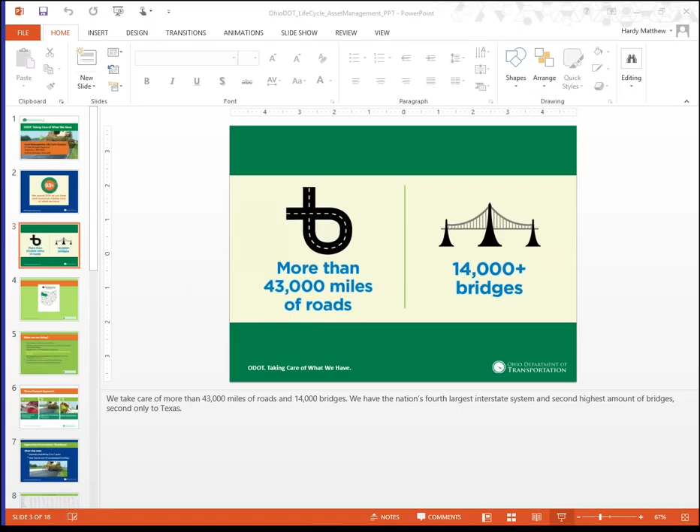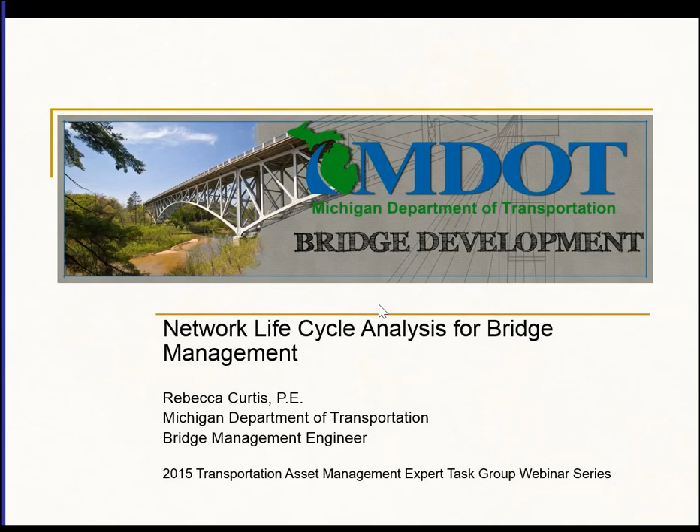All right, well, good afternoon everybody. As Matt said, my presentation is going to try to tell the story of how Michigan has implemented life cycle cost analysis at our network level to better manage our inventory of bridges. So with any good story, we need to set the background for the primary conflict within our plot. And this slide is sort of the MDOT bridge program's version of 'It was a dark and stormy night.'

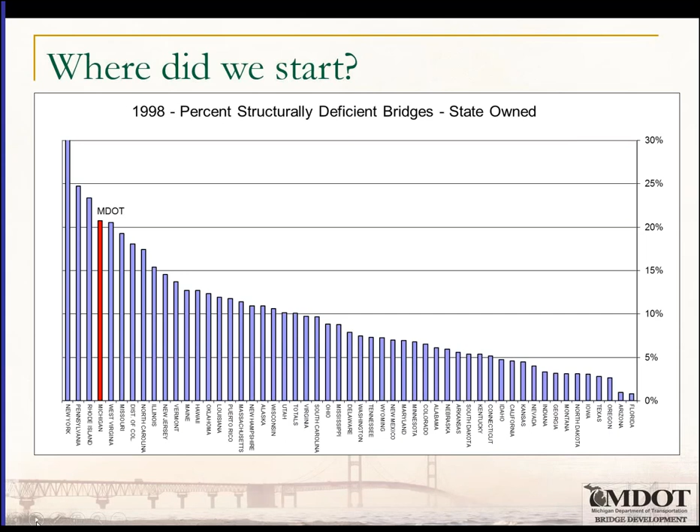So in 1998, MDOT was very near the bottom of the country with respect to the percentage of state-owned structurally deficient bridges that we had within our inventory. So then in 1998, that's when MDOT began our commitment to asset management. In combination with an increase in our state highway funds, we committed to sound asset management practices and the ability to report on performance. Goals were set for each of our programs, and for bridge, we set the following goals.

So first, we have to immediately address the needs of 100% of our structures of critical concern. As safety must always be our primary goal, it's important to recognize that, so that despite your best efforts of asset management, either limited resources or unforeseen events can cause situations which require either restricting a structure, performing repairs, possible replacements, and accounting for this when you're setting your goals is going to give you a more realistic picture of what your needs are.

So the primary condition-based goal for MDOT that was set in 1998 was to achieve 95% of our freeway bridges in good or fair condition by the year 2008. This condition was measured based on the minimum condition rating for the National Bridge Inventory components, so your deck, superstructure, substructure, or culvert ratings, where any of the ratings of 4 or less would be considered poor for the whole structure, 5 or 6 would be considered fair, and 7 through 9 are in good condition. The secondary goal was to achieve 85% of the non-freeway bridges in good or fair condition, also by 2008, using the same NBI minimum condition rating scale.

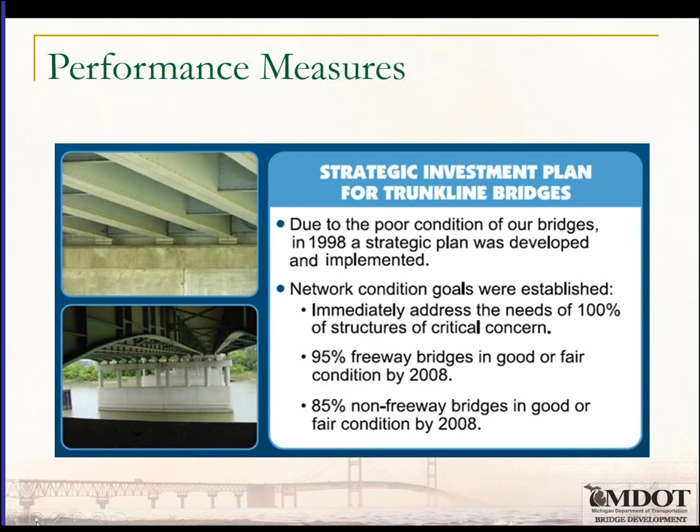So how did we do? Well, as of 2014, you can see that MDOT is now more toward the middle nationally with respect to the percent of state-owned structurally deficient bridges. The 85% non-freeway condition goal was met before 2008, so that goal was achieved. The freeway condition has steadily improved over time to really closely approach the 95% condition goal. However, increasing costs and steady revenue have prevented us from completely reaching that goal.

So we would not have been able to accomplish the improvement that we saw, however, without our focus on mix of fixes, a dedicated preservation template, and the ability to justify performing preventative maintenance on our bridges. And that's where the life cycle cost analysis enters into our story.

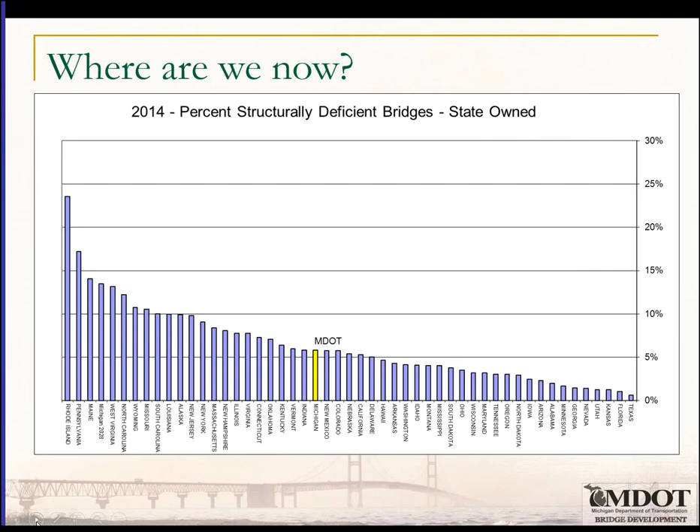So it may help to understand a little bit about our inventory of bridges within Michigan. Michigan has just under 11,000 NBI structures, of which MDOT maintains 4,450. Our overall state-owned bridge condition is currently at 94.2% good or fair. The majority of our inventory was built between 1958 and 1971, which makes it about 50 to 60 years old on average.

MDOT NBI bridges are primarily simple steel or simple pre-stressed concrete structures. Operationally, the structure at MDOT is a decentralized agency, and we are divided into 7 regions. So while the overall network of bridges is managed centrally in my office, each region manages the bridges, including performing inspections, scoping for project selection, and determining which projects should be included within the 5-year plan for their inventory of bridges within their region. In addition to the state-owned structures, our local agencies maintain 6,541 bridges at a condition of 85.3% good or fair right now.

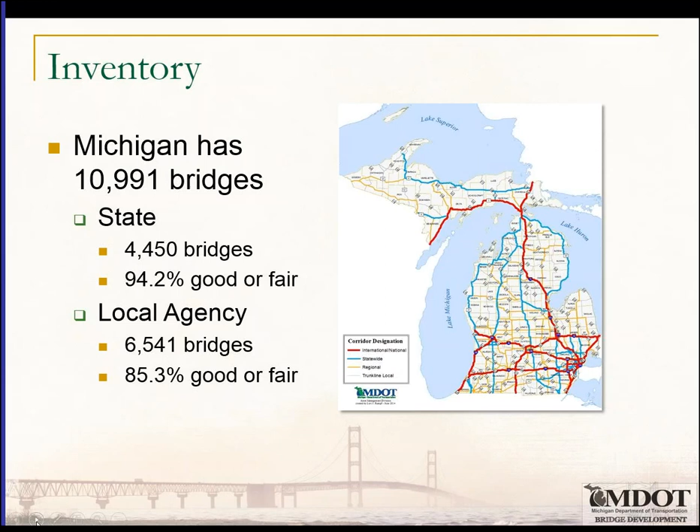So getting into the network analysis, there are 2 possible ways to categorize the asset management for our bridges: network or project level analysis. At MDOT, we use both types of analyses. For our network analysis, we use the National Bridge Inventory minimum condition ratings, or the lowest condition of either the deck, superstructure, substructure, or culvert ratings. Using an internally developed spreadsheet, the Bridge Condition Forecast System, or BCFS for short, we calculate the probability of deterioration, compare it to the investment in projects on our bridges, and use that to predict future network condition levels.

We use the network analysis to manage large populations of bridges at one time and to help allocate funding at the region level. We also use this forecasting tool to provide high-level information on our condition, and that information is often very useful for our executives, the legislature, and the State Transportation Commission.

At MDOT, the project-level analysis is more specific to each bridge. In that case, we use the National Bridge Elements and have historically used Pontis, and now AASHTOWare bridge management software, to forecast conditions at a specific bridge based on element condition. We use the project level analysis to prioritize between possible projects, to manage specific bridge elements, and to provide useful information to our bridge engineers and bridge practitioners.

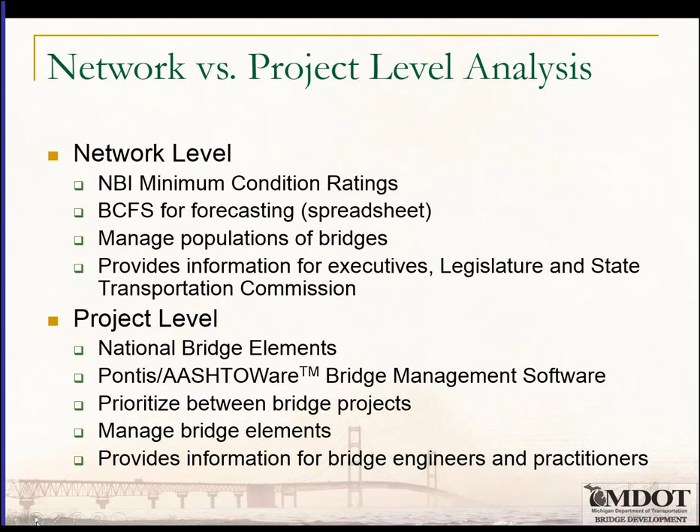So in order to effectively manage our network of bridges, we find it very helpful to have accurate data that's readily accessible by all the people that are going to be managing them. At MDOT, we have a web-based inspection and reporting system called MiBRIDGE. MiBRIDGE allows our inspectors to enter both the NBI and the element level data in the web-based system. MiBRIDGE also allows the inventory to be viewed quickly on the dashboard, which provides condition information and sorting functions, and these directly connect to our condition-based goals.

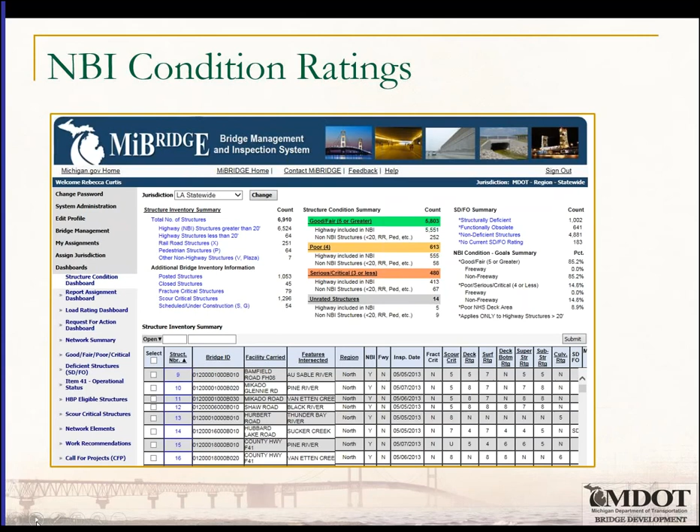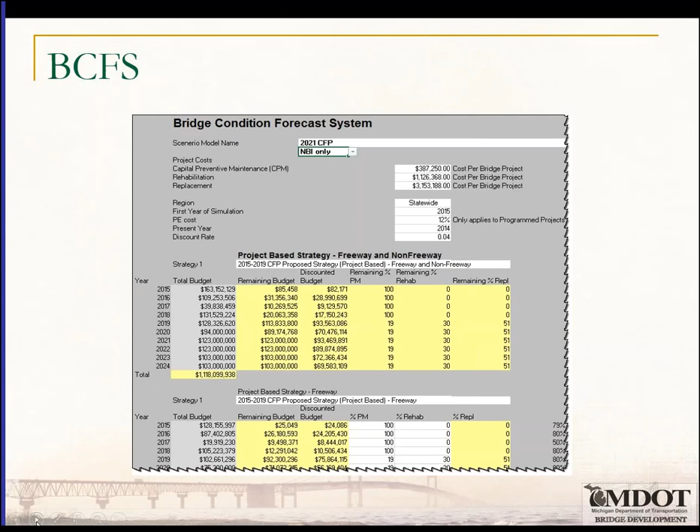This allows the person performing the analysis of their network to evaluate network level condition while still being able to quickly drill down to the bridge level. So using the data that is entered into MiBRIDGE, I populate the Bridge Condition Forecast System, or BCFS, with this information in order to predict future condition. Being in an Excel spreadsheet form, BCFS is easily editable and can be modified to meet a variety of different uses, which I'm going to give an overview of shortly.

So in its typical format, BCFS does require some input. You need to start with the NBI conditions of your inventory, which is the starting point of your analysis. BCFS also requires budgets that are entered to account for the work that's going to be performed on your network of structures. The budgets can be entered as $0, of course, for a do-nothing strategy.

BCFS requires that you identify what your preservation strategy is, or your mix of fixes, which it then uses to dedicate a percentage of the budget to each primary work category. At MDOT, these categories are preventive maintenance, rehabilitation, and replacement. Replacement projects typically focus on poor bridges, which relates to a National Bridge Inventory minimum condition rating of 4 or less. Rehabilitation projects, such as concrete overlays, focus on bridges with minimum condition ratings of 4 through 6, while preventive maintenance focuses on ratings of 6 through 8 in order to delay future deterioration.

Project costs for each of those primary work categories must be entered so that the program knows how far the budget in each category can go. We typically use the average of the last 2 years' cost for the work category to arrive at this number. The next input is the preservation path, or the anticipated benefits of each main work category on the bridges used, based on your budget. Finally, BCFS allows you to enter your programmed projects if you want, leaving the budgeted portions for only the outer years that are not fully programmed.

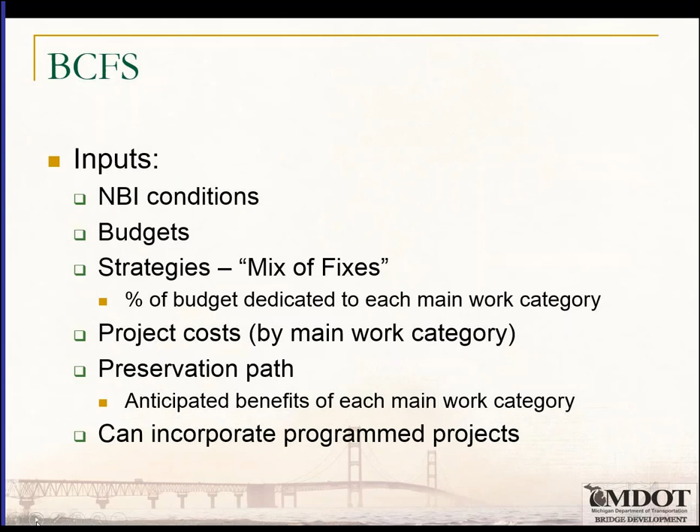So the cornerstone of the Bridge Condition Forecast System is the transition probabilities. Using the changing minimum National Bridge Inventory condition ratings over time, BCFS calculates the likelihood that a structure is going to change from one minimum condition rating to the other. A matrix is developed from our historic inspection data, and then that matrix is applied to the entire network of bridges to project the condition out to each successive year included within the analysis.

So this image shows the transition matrix. The probability of a condition rating not changing is shown in purple. The average time in a rating is shown below that in gray, and then the cumulative time to reach a certain rating is shown in teal. So for this population of bridges, the predicted time to poor, or the time it would take to reach a minimum condition rating of 4 or less, is 43 years.

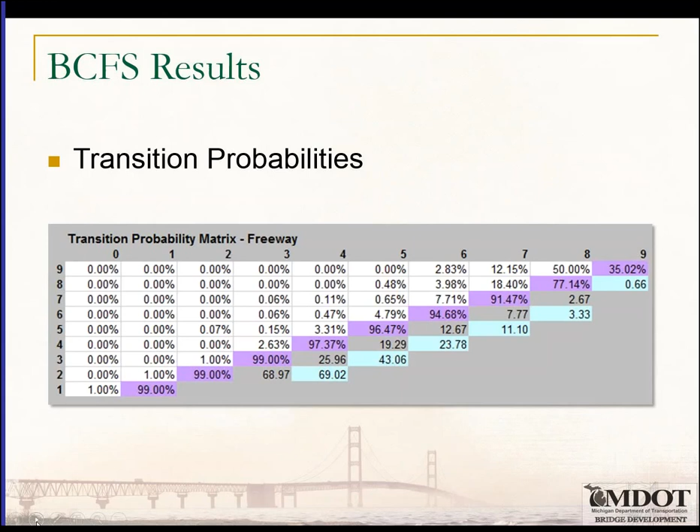So BCFS is also a tool to track deterioration rates, or the number of bridges within a network that fell into the poor category each year. This is not forecasted data, but rather is recorded historical data.

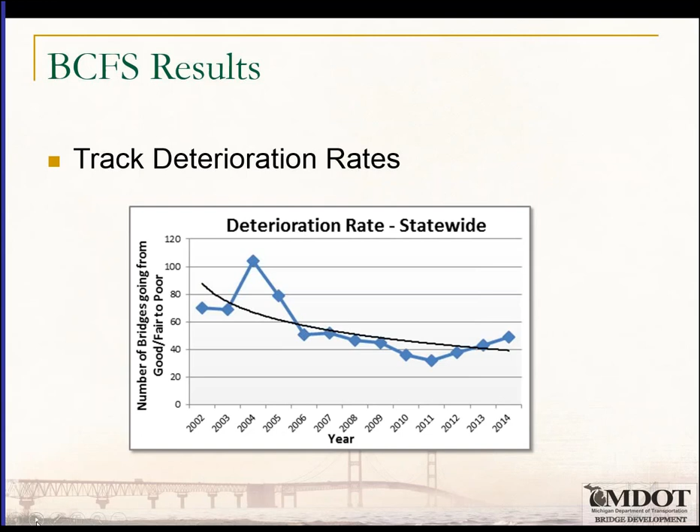Once all of your inputs are populated, BCFS calculates the projected condition. This is a combination of both the deterioration lowering your condition, and then, on the other hand, your programmed work based on actual projects, your budgets, preservation strategies, and the preservation path increasing or maintaining conditions.

In this example, our inventory is split into freeway and non-freeway in order to match our condition goals, but really the network could also be examined in any category that you chose, such as NHS and non-NHS, on-system and off-system, or your entire network together.

The analysis of freeway and non-freeway projections has been used here at MDOT as part of our call for projects process in developing our 5-year plan. So as I mentioned previously, selecting bridges for the call for projects process is done at the region level. However, determining the initial bridge strategy for each region is performed centrally based on our inventory, and that's updated each year. So funding within the bridge templates is then allocated to each region based on need.

And using this initial strategy, the region evaluates the potential projects being planned and then the impacts on the future condition as compared to that initial strategy and also an ideal strategy. As the bridge program is coordinated, of course, with the road and safety programs, the actual program selected for bridge is going to differ from the ideal. But BCFS allows the bridge engineer to predict the impacts of selecting those various projects and can use that in justification of whether or not a project should continue.

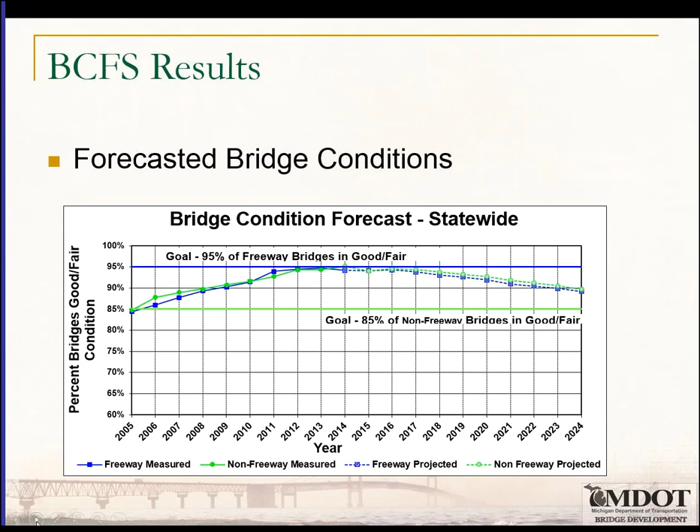Another way that we utilize BCFS is in demonstrating the value of preservation. So this is an example of the flexibility that I find in using an Excel spreadsheet to perform our network analysis. So I was posed a question by the chair of the Transportation Asset Management Council in Michigan. What would have happened if all of our local agencies had not begun to adopt bridge preservation and instead had continued down the path of worst first? Well, by running BCFS scenarios, I was able to model this situation.

So the top line is the measured condition. As the Transportation Asset Management Council was able to communicate the benefit of preservation to our local agencies, more preservation projects and rehabilitation projects were selected, which prevented bridges from falling into lower conditions. This slowed the deterioration rates of the local bridges over time, as you can tell by the improvement in condition.

The darker lower line is a condition that was predicted by the model using the actual budgets in the years under review, but using the transition probabilities that were in place before the push toward bridge preservation and a mix of fixes. So the difference in the condition versus the measured state and that predicted in this chart is just one more tool that can be used to communicate the value of preservation and asset management.

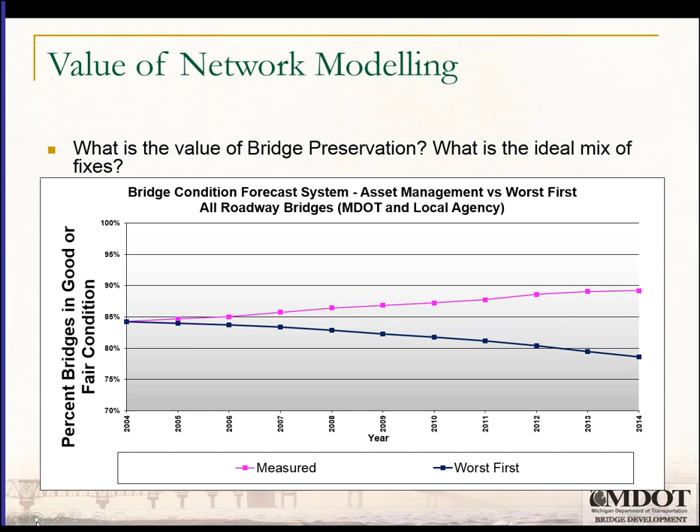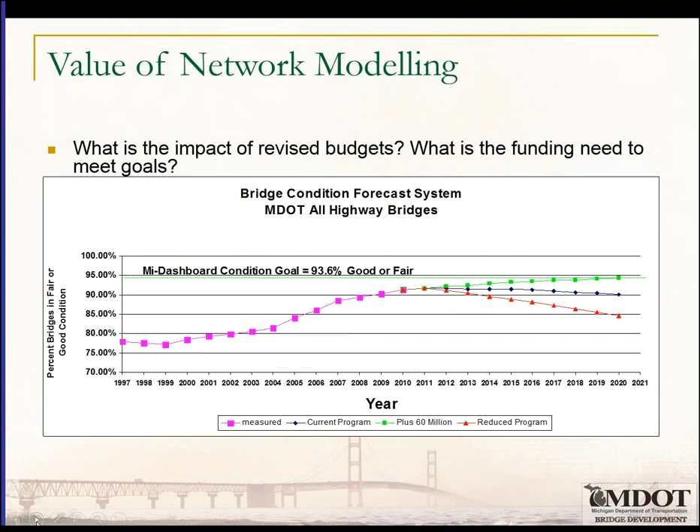So another example of how we use BCFS and our network lifecycle analysis is in the evaluation of innovative materials. Bob Kelly from my office took our basic BCFS approach and modified it to divide the network into 2 pools over time. All of the bridges start off in the main pool, but when they're replaced, they are moved into a second pool with lower deterioration rates. And this is supposed to reflect the benefit of the innovative material. So the network condition at any point is simply the sum of what is in each pool.

Simulations were analyzed for a few sample assumptions to demonstrate the process, where both the replacement cost was varied and the deterioration rate was varied, ranging from 1.5 times the cost of a conventional bridge with 1.5 times the life, all the way up to 2 times the cost of a conventional bridge and 2 times the life. The scenarios assumed a budget which was sufficient enough to correct most condition deficiencies in the short term. And when the effect of the discount rate starts to cut into the number of projects that you are able to perform in a year, the condition starts to go downhill, which happens at a rate around 10 to 15 years.

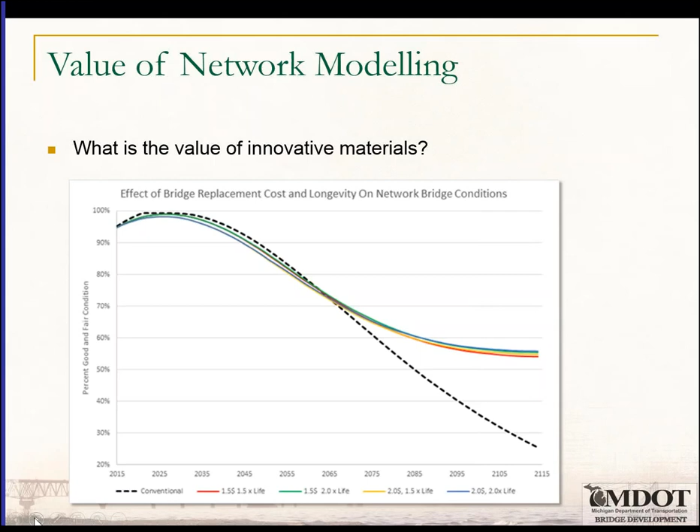Since it takes a while to build up a population of the more durable bridges as they're more expensive, then you don't start seeing the benefit of building the longer lasting bridges for about 50 years down the road. So until then, you pay a small penalty in network conditions because of the slightly fewer projects, but by the time you get 50 years out, those investments start to pay off. And so this is an example of how an innovative material with an assumed addition of life can be evaluated to see how long we need to make that investment before we start to see the benefit.

So the black bar results are used to provide guidance on the timing of preservation actions on our existing bridges, while the epoxy-coated, stainless, and FRP results will be used both to provide guidance on existing bridges as well as to develop use cases for when it's cost-effective to use the longer life materials such as stainless rather than epoxy-coated reinforcement. Creating this document allows all bridge decision makers in Michigan to benefit from our network analysis without having to actually run the analysis themselves.

So to use this chart, the decision maker looks at the condition rating in the upper left for both the top surface and the bottom surface based on NBI condition and also percent of deficiencies. And then you follow the correct row over to identify the repair option. And we also provide then the potential result of the repair and the anticipated fix life of the repair.

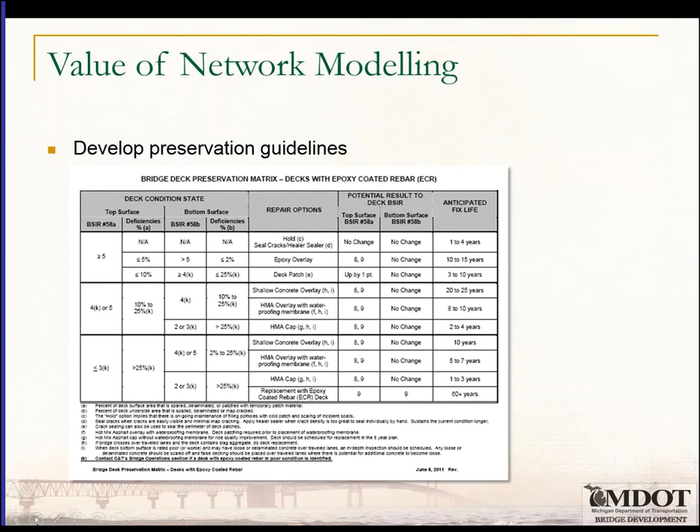And then looking ahead, MDOT's interested in performing multi-objective network modeling. We hope to incorporate additional risks beyond merely just deterioration to analyze our bridge network and to perform similar analyses that I mentioned previously, including the expected performance based on existing budgets, identifying required budgets to meet performance goals, identifying the benefit of innovative construction methods for materials, and developing preservation guidelines for use in project selection.

We've made steps in the right direction through a scour prioritization analysis, in which we plot the vulnerability versus the criticality of each bridge in the network. And what we're looking forward to is including this into our deterioration analysis at the same time in order to come up with a multi-objective optimization.

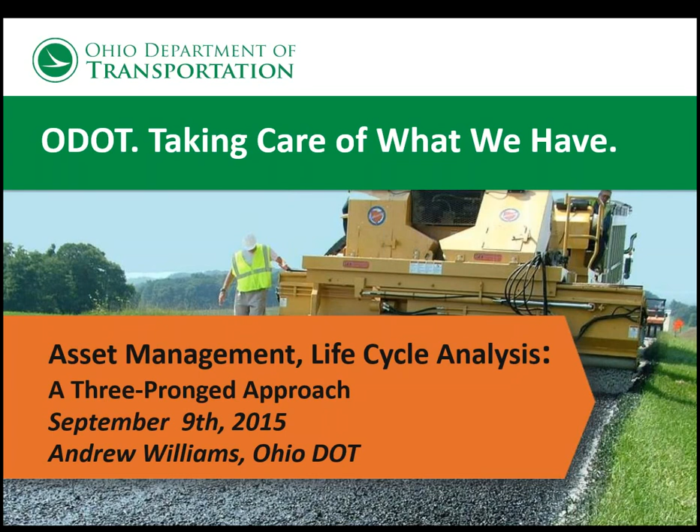Okay. What we found out is that 93% of our time and resources is spent taking care of what we have. That basically means that we're not building a lot of new stuff. Most DOTs are in the same position, so we're not creating a bunch of brand new designs and things like that. We're really trying to hone in on taking care of what we have, and our asset management plan actually reflects that.

A little bit about Ohio. We've got 43,000 miles of roads. That does not include the urbanized roadways that are controlled or managed by our locals. When we add that together in terms of state miles, it would come up to about 50,000 lane miles. And then we've got 14,000 plus bridges that we deal with and about 80,000 plus culverts. Just to kind of give you an idea of the size of the network that we have.

So what are we doing? We're fostering more consistency across our districts. Our asset management plan is actually doing that. We're building a collaborative project selection process, building optimized investment strategies. We're utilizing the Deighton pavement management system to do that, optimize run, identifying the treatments, and development of our work plan. And then we're going to help ensure that our statewide goals are achieved.

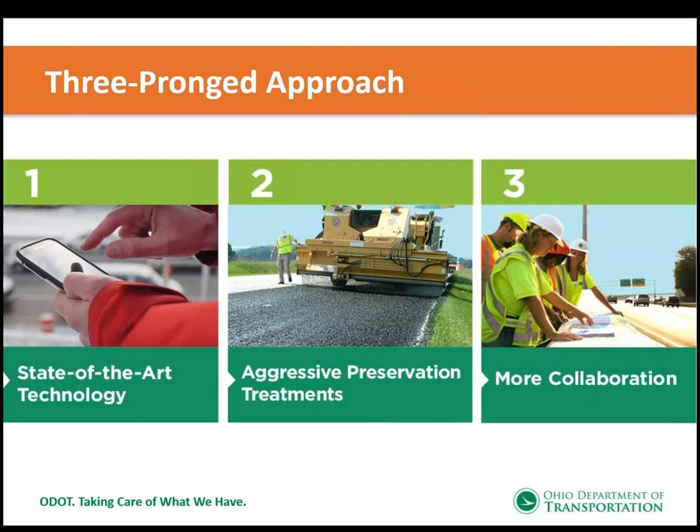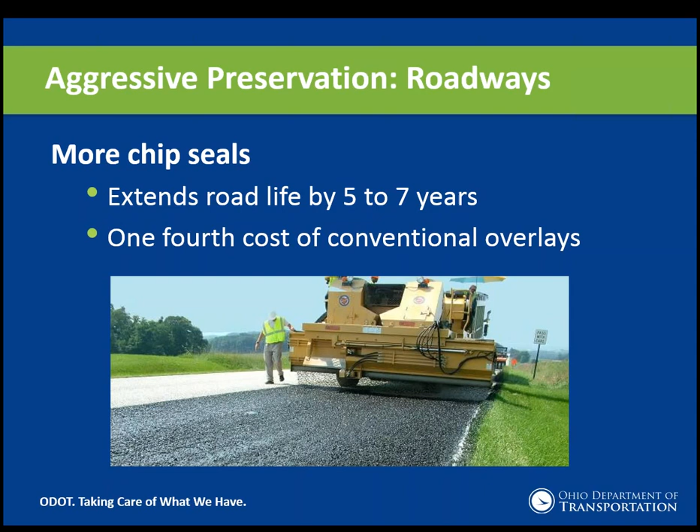So with that, the chip seals - District 1 that I showed you on that map, they do their chip seals themselves, and they're doing them for roughly about $4,000 to $5,000 a lane mile, if you can believe that. They're excellent at doing it. They've been doing it for a while, so they are a poster child for how to do chip seals. We're going to take advantage of that, not saying we're going to do most of our chip seals in-house. We're not. We're going to contract a lot of it out, but where we have that expertise, we're going to utilize that.

Now let's jump into the life cycle portion of it. We have developed a transportation asset management decision support tool. That tool allows us to look at our data, for example our pavement data, and actually learn something from it. Again, these are things that we really didn't know.

So when we start talking about the life cycle in terms of how long your treatments last, you really need to dig in and understand what's really going on in your state.

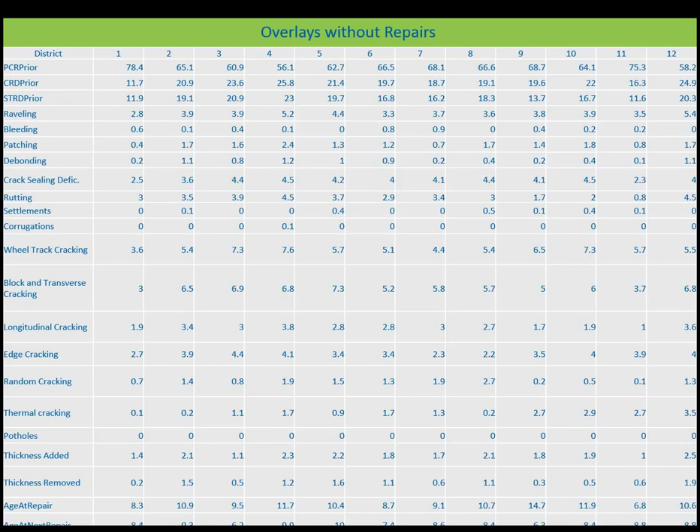As you go down toward the bottom again, what you'll find is the thickness removed and the thickness added. On average, District 1 was doing 1.4 inch overlays, which is pretty typical for our thin overlays, 1.5 inches. But then you look at our District 3, they were doing thin overlays also, but they were putting them on pavements that were a lesser PCR. So the life we would get out of them is 8-point-something years versus about 6 years. Imagine doing an overlay on a roadway, and every 6 years you're going to have to do another overlay at a cost of about $150,000 a lane mile.

So what this identified for us was that there was some savings we could have if we were to introduce these preservation treatments, but not only just introduce them, but when we start talking about whole life, introduce them in a way that gets us more consistency, putting them on the right pavements. But how do you put them on the right pavements if you don't understand the performance of these treatments in and around the state you're working in?

For example, we're thinking we're going to get about $600,000 in savings on just one section of roadway by using the preservation treatment, putting the right treatment at the right time, but understanding how it performs. We're utilizing the Markov transition matrices as our forecasting tool. We're actually forecasting individual distresses, so it allows us to run that decision tree out in the out years to identify what kind of candidate treatments we're going to do in the future. So that's where we're going to get our savings.

We're also estimating that we're going to save roughly 10 to 15% of our capital program. Our capital program is $2.5 billion, so you can guess that our executives have their ears wide open in terms of hearing that kind of savings. I honestly think we're going to get there.

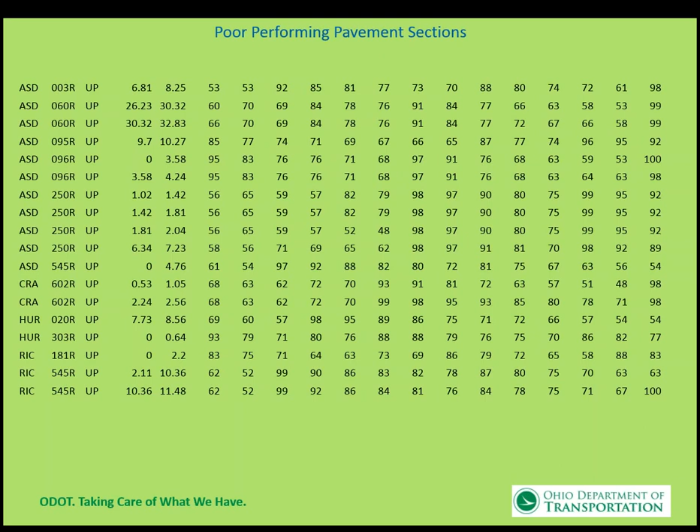So we've set up the tool to be able to identify those, so we can pull them out separately, address those, and then put them on a preservation mode going forward.

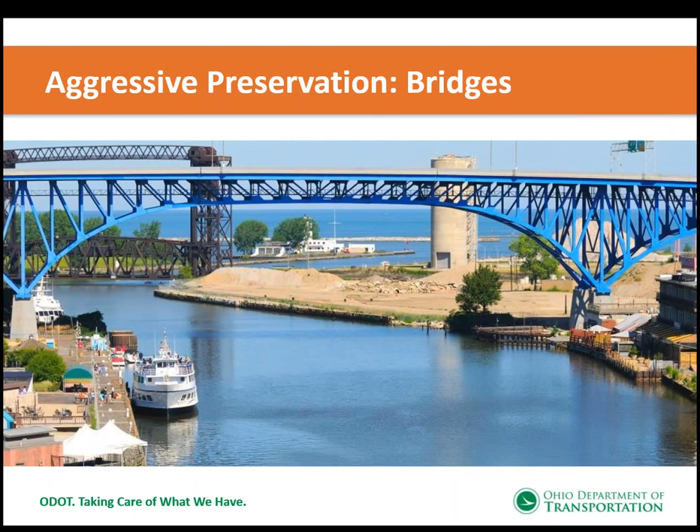I'm not going to speak about the bridge side of it, but we'll mention that we have preservation treatments identified for bridges also. That would include bridge cleaning, sealing the decks, and sweeping our bridges. We feel like we're going to get a lot of bang for the buck out of that, but it's going to take some time for us to see those results. We've introduced those treatments already, and they're included on that one work plan to identify those activities from a capital or maintenance standpoint.

Collaboration, which is huge: the capital and maintenance work plan, again, under one plan. Continuous interaction with our frontline crews, our local governments, and contractors. Everybody's in this. We're going to manage this thing holistically from top to bottom. Our frontline folks who are out there seeing everything day-to-day—we're taking their comments and including them in the decision-making process in terms of identifying how we're going to handle those.

For example, if the pavement management system identifies a project that's going to be done in 2018, typically we were doing worse-first. Now we're saying let that really bad pavement go for another two years. Our maintenance folks, our frontline crews, are the ones that are going to step up and pick up the slack and hold that project, that segment of roadway, together until we actually get to the capital project. We've termed that a gap project. So our frontline crews are identifying where those gap projects are at.

The example I showed you earlier where we were spending about $280,000 a year maintaining that roadway so that it was serviceable—what we might find out is that that's too expensive for us to do with our frontline crews. That project would then get moved up, pushed over to the capital side, and the capital side would actually program that into the DTAM system. So that's an example of how we're going to make that work.

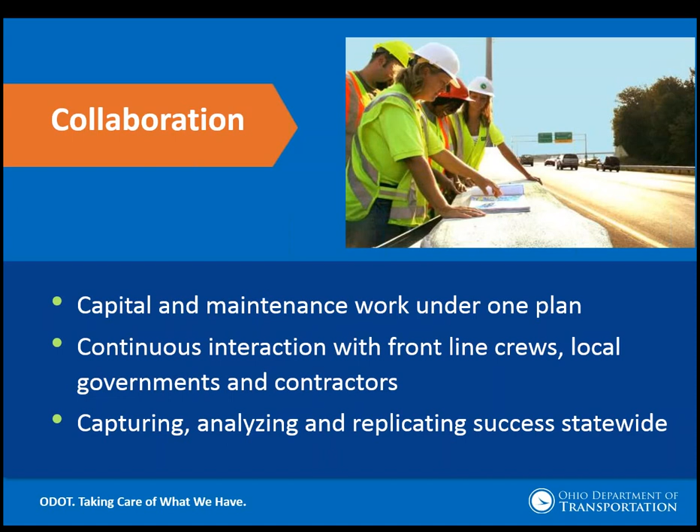Capturing, analyzing, and replicating success statewide—I showed you those charts where District 1 seemed to be doing a very good job of preserving their pavement asset at a very high level, a very high serviceability rate. We want to learn from that. We're going to learn from the maintenance side, and we're also going to learn from the decision-making side how we're going to manage the whole life of that particular asset.

Communication plan: what we found is that collaboration is good, but it's only as good as people understand it. So we put together a full-blast communication plan that includes fact cards, FAQs, talking points, the elevator speech, a video, web page, and PowerPoint. This will get pushed out to everybody within the DOT internally, and it will be done at varying levels. For example, our highway technicians, who are frontline folks, will have a different version of this elevator speech than our planning and engineering side, all the way up to our executive management.

On the external side, in terms of introducing new preservation treatments and managing the whole life of the asset, we felt it very important that we communicate with the industry, because we have not done a lot of chip seals and we have not done a lot of micros. We want to make sure that the industry can handle all those miles of chip seal and micro surfacing, and also reassure them that the program is not going to really change other than some different treatments, giving them time to get geared up to be able to do that.

And then lastly, be able to communicate the direction that we're going to our legislator and ultimately to our public who are actually paying for these investments, to show them that they're getting a good return on their investment. So again, we are taking a little bit of a different approach to the life cycle cost analysis portion of it, recognizing the fact that we did not know a lot of things about how our assets were performing, and to take care of that part first so that we can truly affect the kind of change we want and get the desired results that we wanted to get. Thank you for your time, and then I'll turn it over to Matt for the next presentation.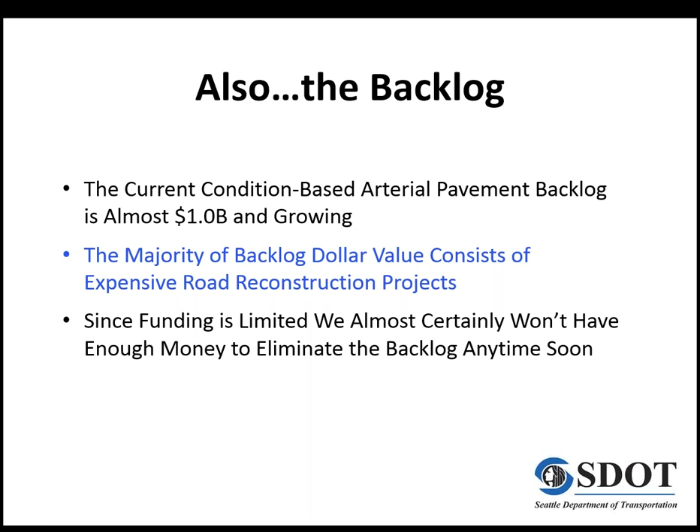So then the big question is, how do we balance our current paving needs and reconcile all of this existing backlog, all with pretty limited funding? This is a map of Seattle, and basically everything you can see on this map that is of a magenta color are roads that are part of our backlog. So this is sort of setting the framework here.

And with that in mind, I'm going to hand it off to Tim, who's going to talk about this benefit cost-based paving model that we've developed that is actually pretty new. It's still a beta product, and it's been around only about 2 or 3 months now.

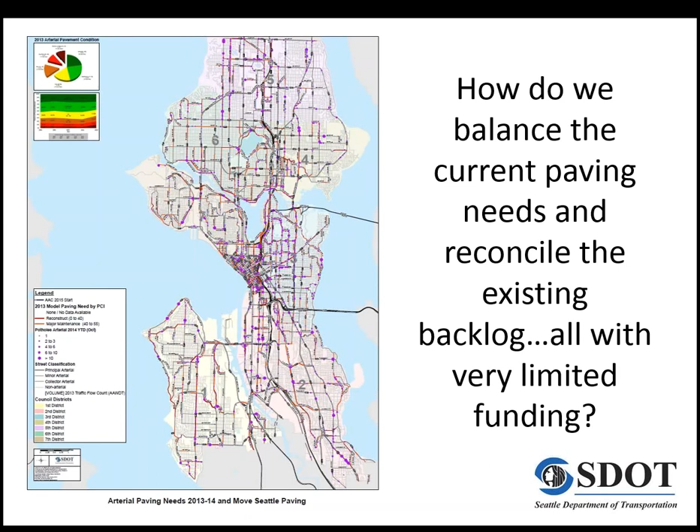Hey Tim, it's Matt. So I'll just go ahead and click through it. Something was happening, I heard you clicking. It wasn't working, so I clicked it. Just let me know next slide, and I'll go through it. I'll click it for you.

Okay, hi everyone, glad you've joined us here, happy to come talk about this. So I have a couple of slides that have a lot of words on them, but the point of having these up here is to say that part of the roadway cost involves the cost to users.

And if we're really going to talk about life cycle cost, we should have the pavement cost and the cost to users. It's been recognized that the impact of poor roads on users drives up vehicle operating costs for cars, trucks, and buses, anyone who's on the road. So we wanted to take advantage of that to think about where we would put our money to the best use. We're here to serve the people who are using the road, so shouldn't we take their value of use into account in prioritizing which roads we work on first?

So just to say that we can look at this: total life cycle cost should include user costs. Next slide, please.

And this, again, is a lot of words, just to say that a few examples of a lot of the research and studies that have been done connecting the condition of pavement to vehicle operating costs. There's quite a bit of data and research on how the roadway impacts users. Next slide, please.

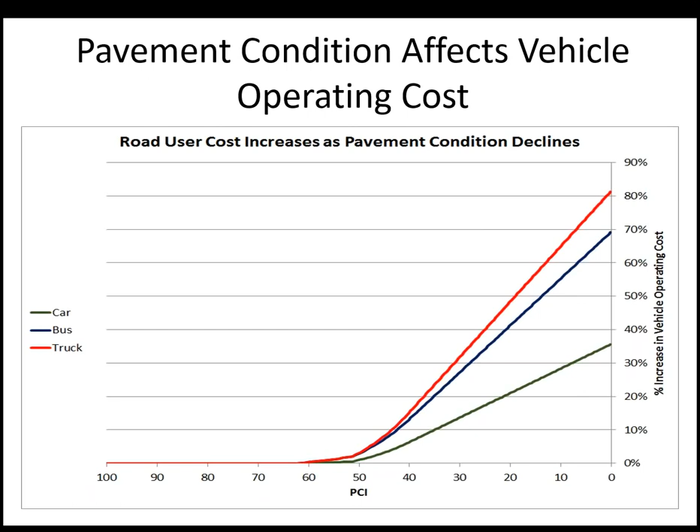We use a pavement condition index to measure our roadway conditions, and we have a survey of our arterial roads every 3 years to find out what their condition is. But as you can see here, the increase in vehicle operating costs as the road condition - our PCI - drops below 60 and heads on toward the failed condition at 0, shows what happens to impacts on vehicle operating costs for cars, trucks, and buses. Next slide, please.

So this is the very familiar part of pavement cost, the cost of restoring it. It's well known that if you get in early and do some preservation and early maintenance, the life cycle cost of that is very cheap. It's a really inexpensive way to lengthen the amount of time that you can maintain the pavement's condition.

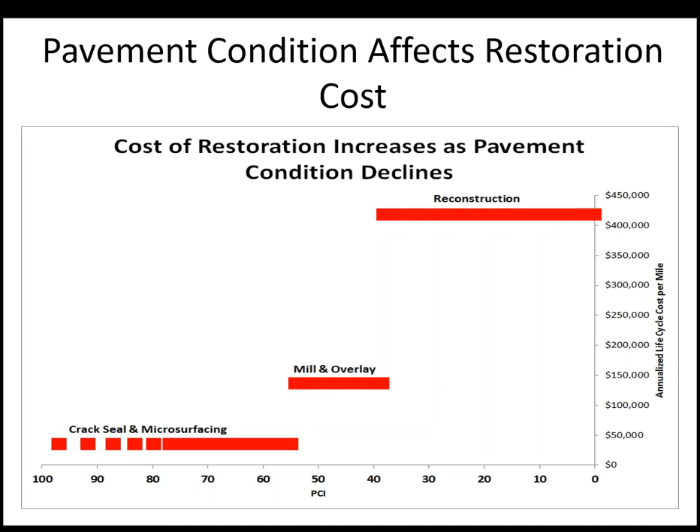If it drops below, into that 60 to 50-something range - it's obviously dependent upon a particular street - you're now into a more expensive kind of treatment to restore the condition, and that's the mill and overlay. The same transition happens if the road falls too far in its condition; then a mill and overlay won't work to restore it, and you're into pavement reconstruction, which is a lot more expensive than mill and overlay.

So the next slide. Here, just to put a framework around this: from an economist's viewpoint, cost and benefits, or value and cost, are two sides of the same coin. So I'm turning it around here and saying the cost to users of decreasing and declining pavement condition can be turned around to say, well, what are the benefits from improving that condition? So here I'm listing them.

I'm showing the benefits to road users in terms of vehicle operating costs of restoring the street. And you can see that starting somewhere around a pavement condition index of 60, if you restore the street's pavement condition, you'll get a certain benefit. The benefits climb as the PCI gets worse - you get a bigger benefit if the street is worse than if the street is not as good.

Secondly, streets that, and VOC here, and the little arrows and the words saying benefits from reduced VOC, that's vehicle operating costs. A high traffic volume roadway is going to have bigger benefits than the exact same roadway with lower traffic volume. So here's one of our points of saying, how do we know which roads, if we had two identical roads, identical conditions, everything about them was the same, cost of restoration? Well, we could just look at that and say they seem to be in the same boat. But if one has 3 times the traffic of the other, then its value of the restoration is much higher than the one that has the lower amount of traffic.

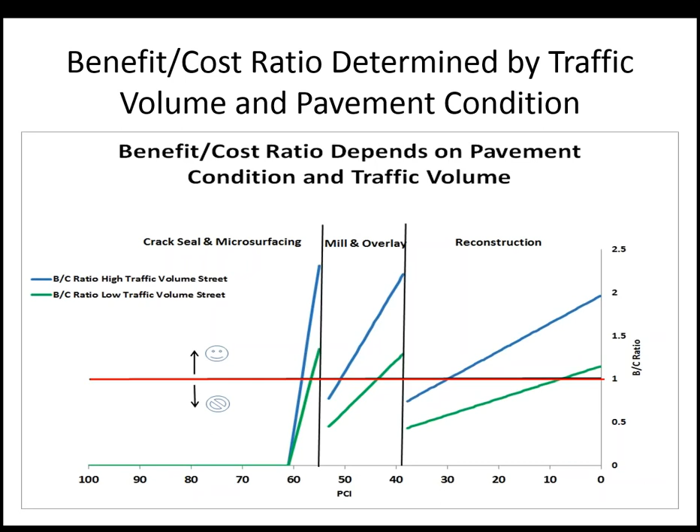This is the same information portrayed differently on the graph, and what it's showing is the benefit cost ratio. The blue is a high traffic volume street, and the green is a low traffic volume street. And if we were going to say this would be the optimal treatment, if we had unlimited funds, we would do anything that had a benefit cost ratio greater than 1. That's that red bar that runs horizontally there. Anything greater than 1, we would do it. If it's not 1 yet, we don't do it.

So this would show us that there's a lot of streets that we won't do anything with, even if we had all the funding that we could ask for, until they reach a poor enough condition, and we'll be spending more on streets that have high traffic than we would on streets that have low traffic.

And we have some more slides here to talk a little bit about the issue of what we call the backlog. Right now, we basically say any street whose condition is below 55 or so is in our backlog. It needs us to go spend some money. This says not necessarily true. There's a lot of streets where the value to users of restoring the street isn't high enough to justify the cost of restoring the street.

So we would change our definition of a backlog using this method from what we have now, which is any street in poor condition we're going to spend money on. That wouldn't necessarily be true if we were really saying, let's look at the value to users of how we spend money. After all, we not only have trade-offs within our own agency of whether we're spending money on new shiny stuff or trying to preserve what we have, but we're competing with schools for funding locally. There's plenty of good ways to spend money publicly besides on roads.

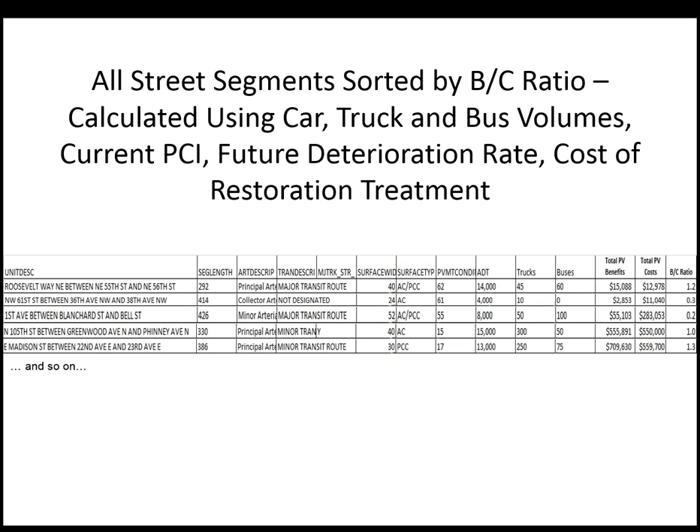We would compare the present value of the cost of restoring the street with the appropriate treatment that's available to it, to the value of that restoration to users, and get a benefit cost ratio from that. So each street gets ranked by a BC ratio, and we would stack them in order from highest BC ratio to lowest. Actually, go back to the slide before, because the point I did want to make about that was,

if we don't have enough money to do all of our streets, and we certainly won't have it, even if we said we're not going to do streets that don't have a benefit cost ratio greater than 1, we still aren't going to get enough funding to do them all immediately. So really, that red line, we could put it up to 1.5 or 2, and we would do all of the streets that were above that until we run out of funding, and then move on to the next cycle.

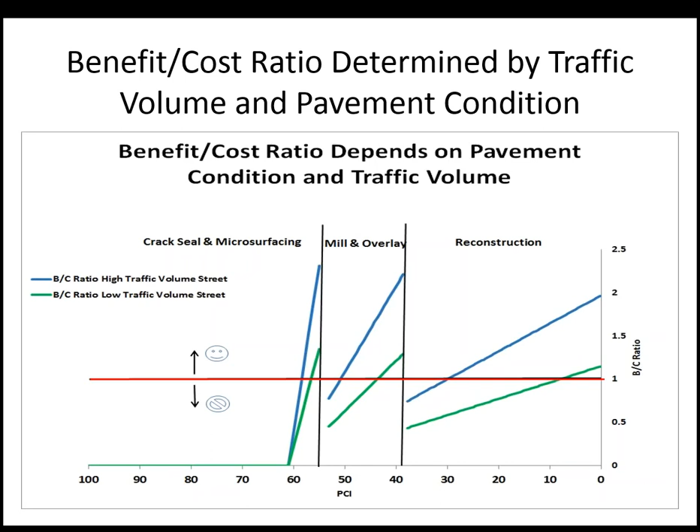So the other point of this model is to say we can allocate the funding we have, even if it's not sufficient to do everything we would want to do, to the streets that have the biggest bang for the buck, to the users of the streets, the whole point of why we're here. Okay, so go down a couple more slides.

One, yeah. So let's just go through and show you an example of a street in Seattle that makes a good poster child for this. So this is a little bit less than a mile of street, and since 2003, we've scored it 4 times, and every time we go check the pavement condition, it's in a very poor pavement condition, in the mid-teens, which is basically what we would call failed.

We haven't done any work on this street other than work for safety, to make it serviceable, so we've filled potholes and fixed big cracks, but other than that, we haven't done anything to it for a decade or more. And it keeps working, right? It's functioning. Cars, trucks, and buses are driving down it. But the issue for cars, trucks, and buses is that it costs them something to drive on poor pavement relative to what it would cost to drive on good pavement. So next slide, please.

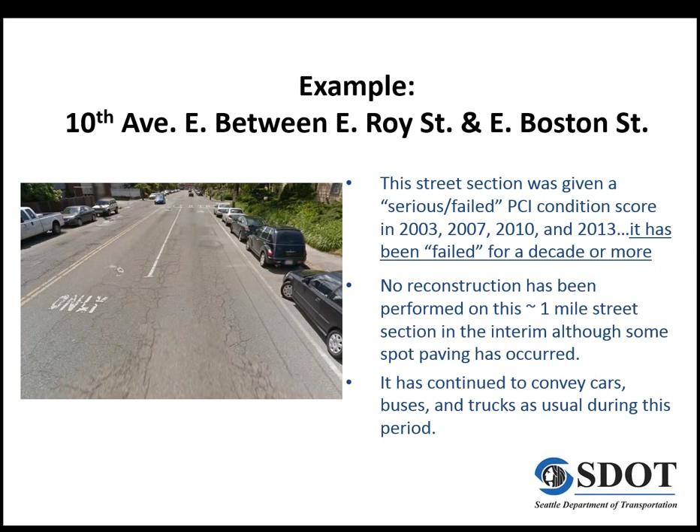So here's what the agency, our SDOT, has spent on this street in the last 10 years in pothole repairs and spot paving, and a little bit of claim damage. About $63,000 a year being spent to keep this street up. So that's part of the life cycle cost, and if we were to restore it, we would avoid those costs. So that's part of the cost, but go to the next slide, please.

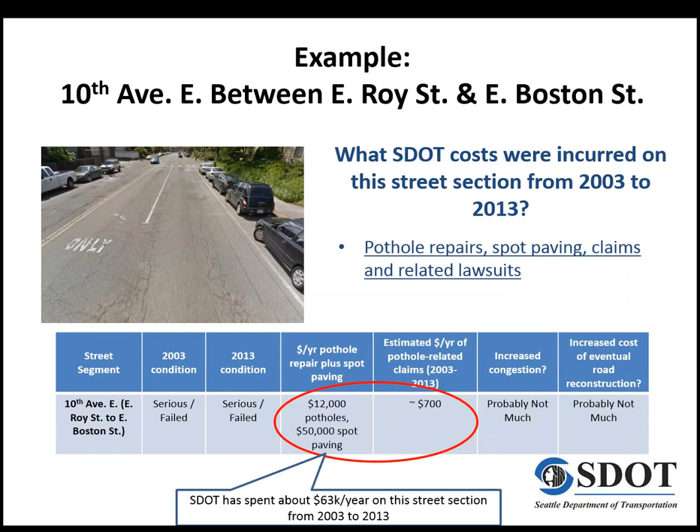We also have accumulated user costs. So when we look in our model to say, what does it cost users over these last 10 years, and just to tell you a little bit about the data, we've got roughly 13,000 cars driving on this road a day, 400 plus trucks, and 150 or so buses a day. So the vehicle trips per year and the impact on their costs given the pavement condition, about $420,000 a year in additional vehicle operating costs over the last 10 years due to the road's condition.

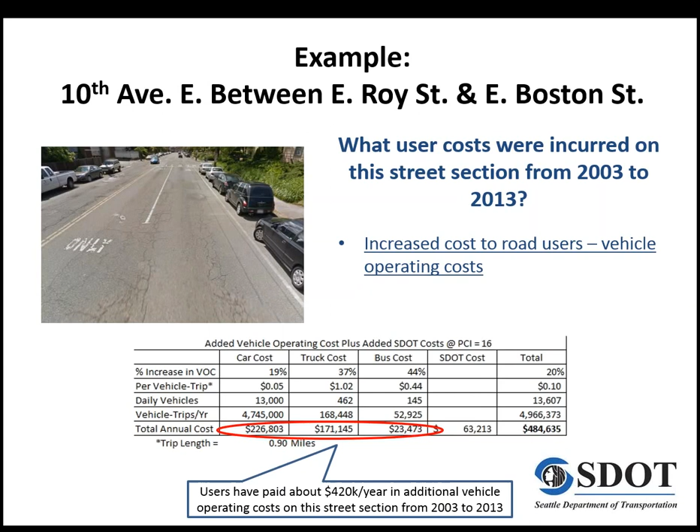So that is the life cycle cost side of this street in only keeping it serviceable and not restoring it. So the next slide, please. What? Okay.

If instead, and I only changed one thing on the model inputs here, and that is I doubled the number of cars, trucks, and buses on the road. If this street were a lot busier than it were, its ranking on this benefit cost ratio would jump way up.

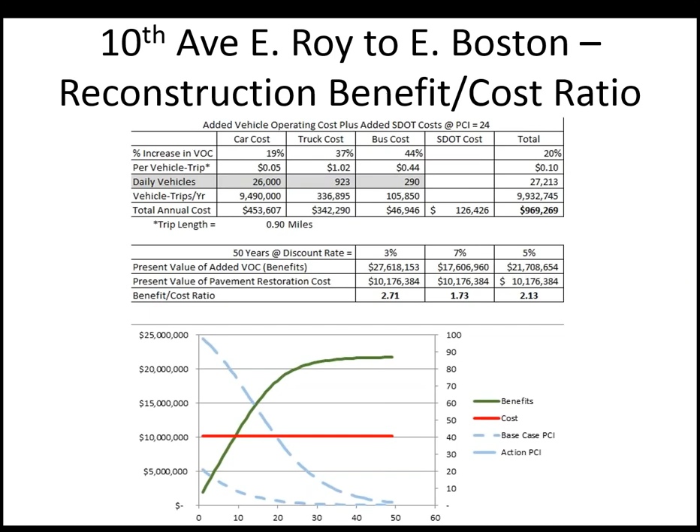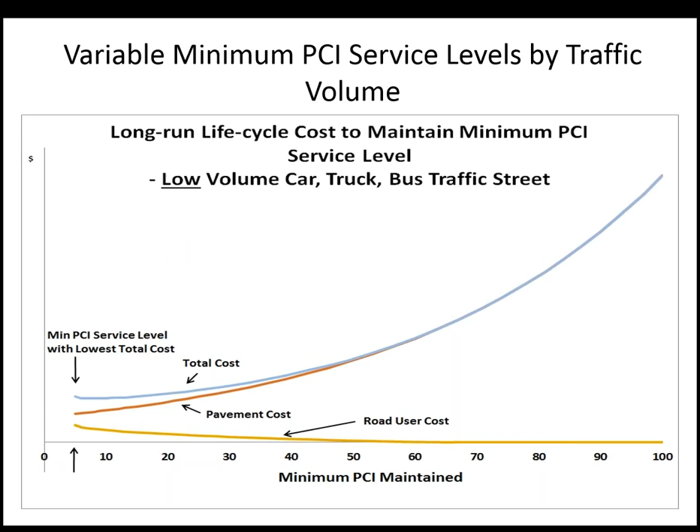They still work. People still go down them, but they're in really poor condition, and the impact on individual vehicles' operating costs is high, but there's just enough on there to make it. So we may have some splitting up of how we deliver service levels according to the value to the road users.